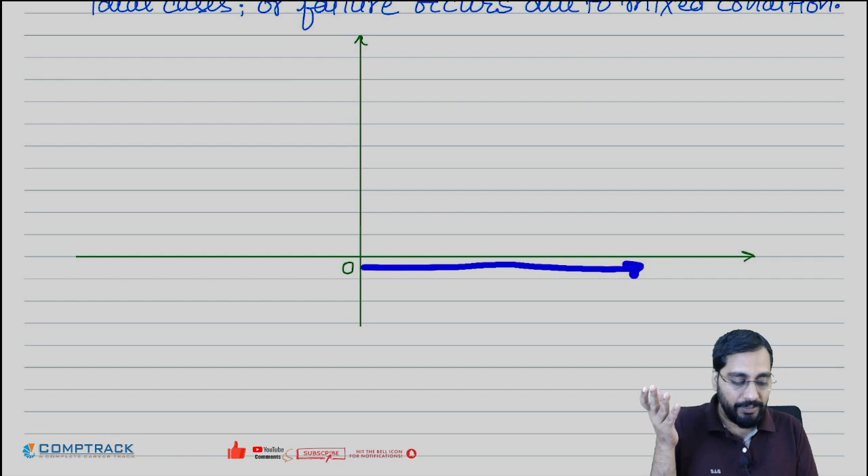Kaise banaya diagram? On X axis, he considered pure static loading. So in case of pure static loading, when stress value will reach sigma ut, then failure will come in picture.

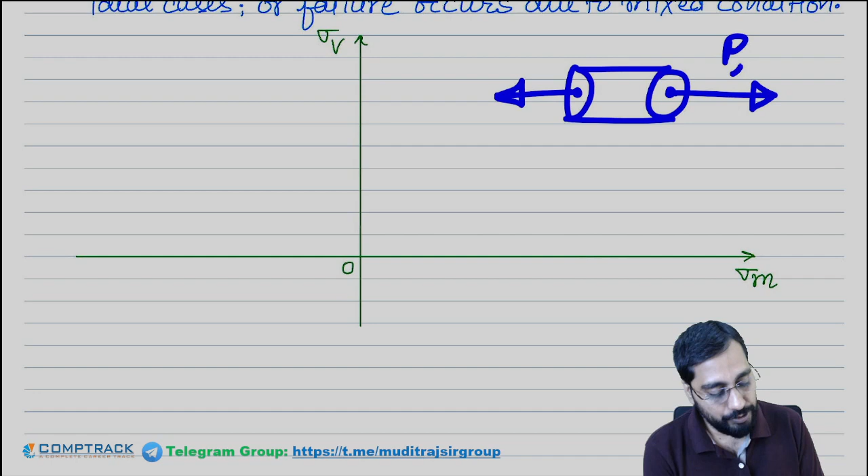So here he considered sigma m and here he considered sigma v. So for static loading, let's say this is the member and you are applying the stress like this. So load will increase 0 to, let's say, maximum value. So stress will increase minimum to maximum.

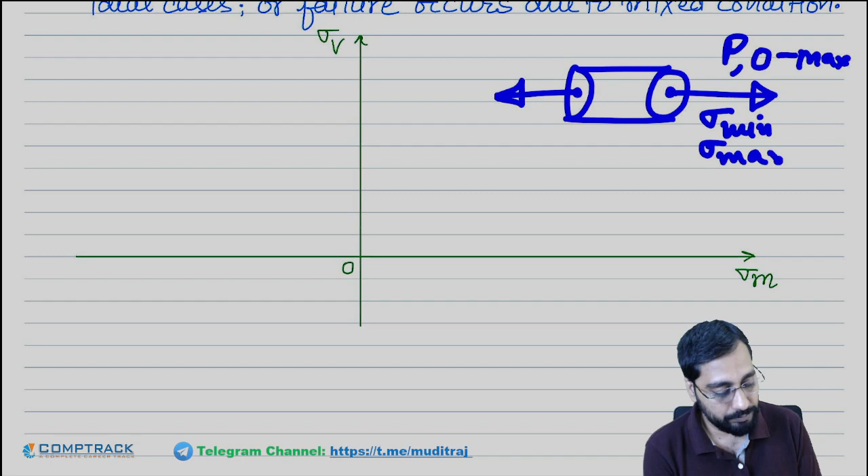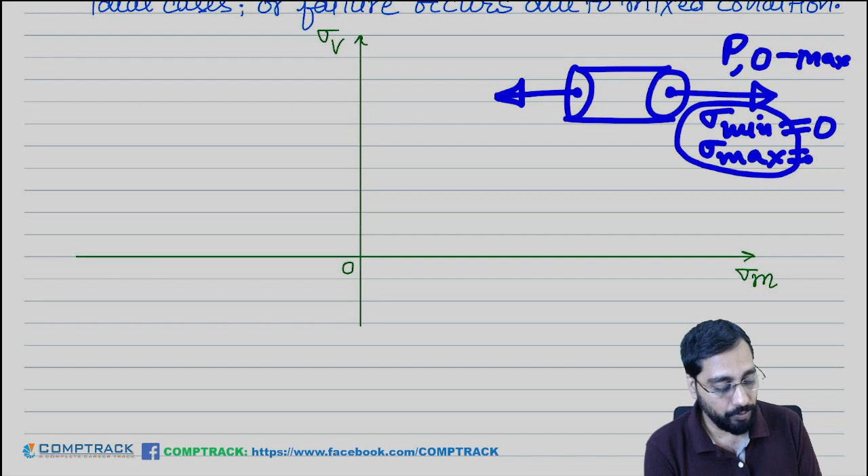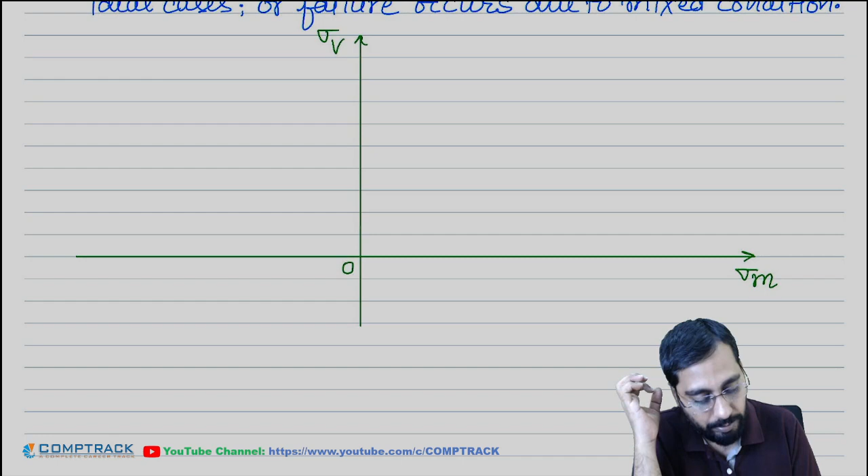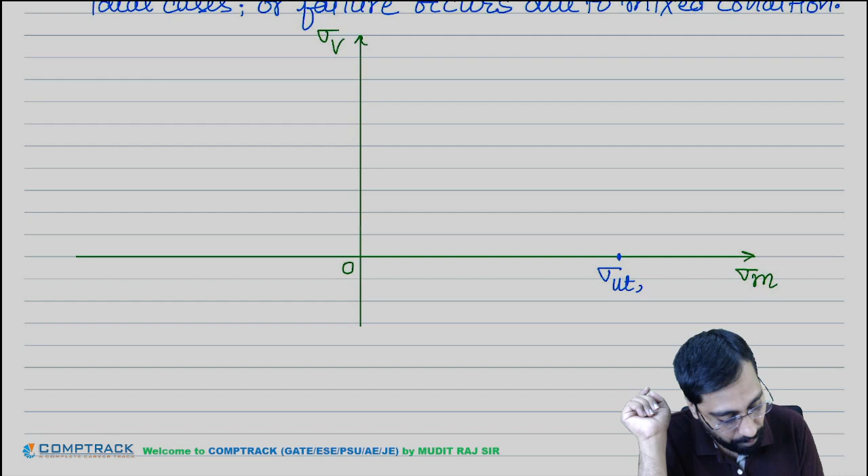So in this case, minimum will be equal to 0 and maximum will be equal to sigma ut. So when sigma ut value will reach, material will fail. So on the sigma m axis, you will get a point of failure due to static loading, that will be sigma ut comma 0.

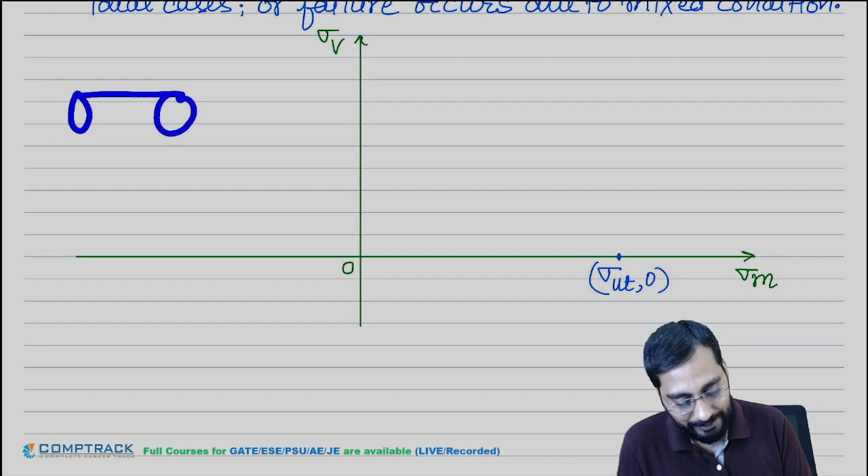Now when you consider second case, load is completely reverse, plus and minus, plus and minus. Let's say plus 100 and minus 100. In that case, the mean stress will be 0. So sigma mean will be 0. This case will lie on y-axis.

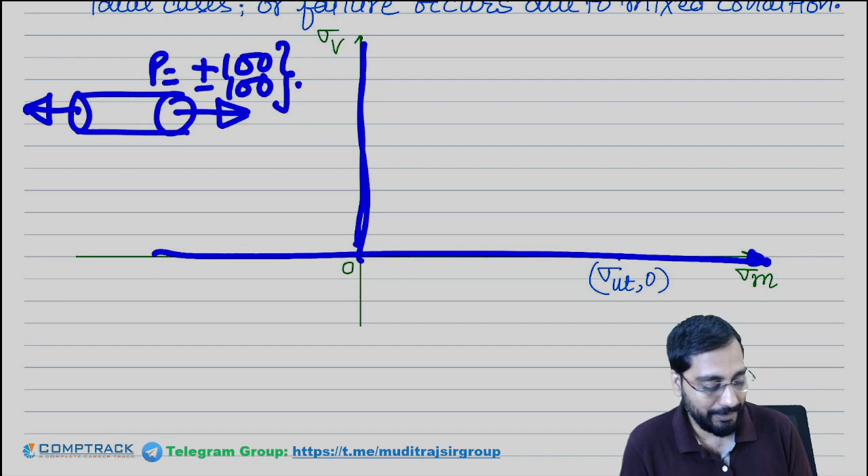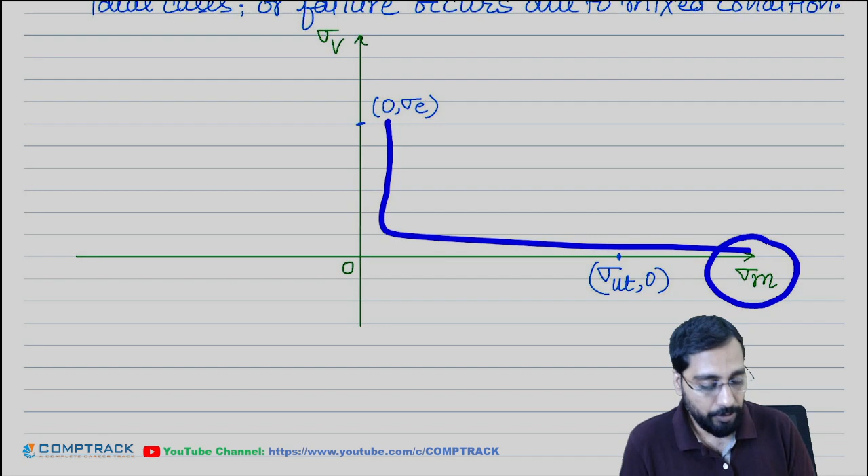Static wala lying on x-axis. So point will be here. And failure will happen at the sigma E. So this point will be actually your sigma E. So 0 comma sigma E will be the point, because 0 will be for sigma m. So for completely reverse loading we know sigma m is 0. For completely reverse sigma m will be 0.

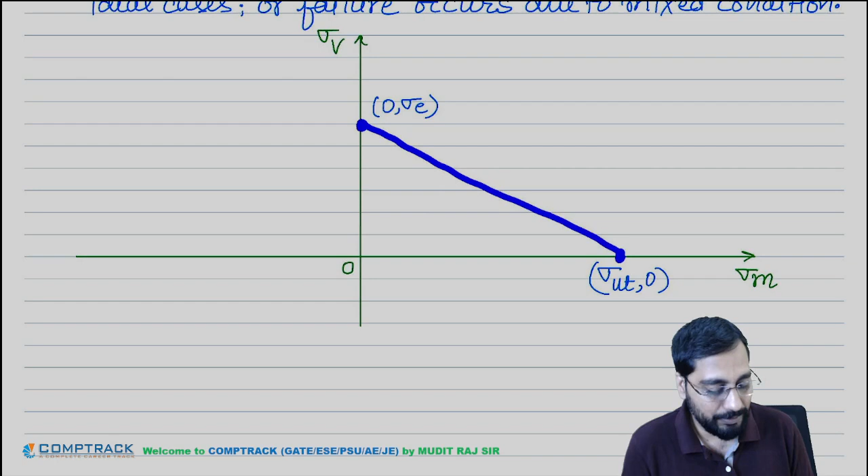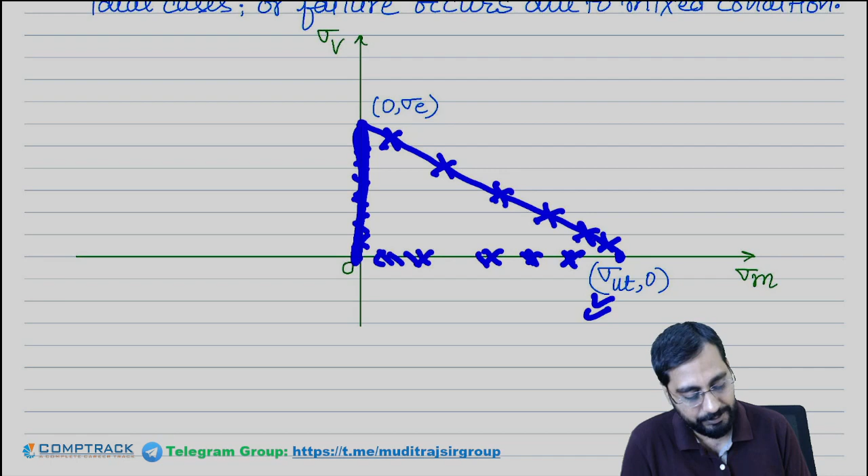Yes or no? So these are the two ideal points, but real situation lie between them. So you will connect with the line. Failure can occur here, here, here, here, here. Or if you talk about this point, then stress is less than sigma ut, failure will not happen. So at this point failure will not happen. These all are safe points. So here also failure will not happen. These are the safe points. So when you will go inside this area, for all these points, these will be your safe points.

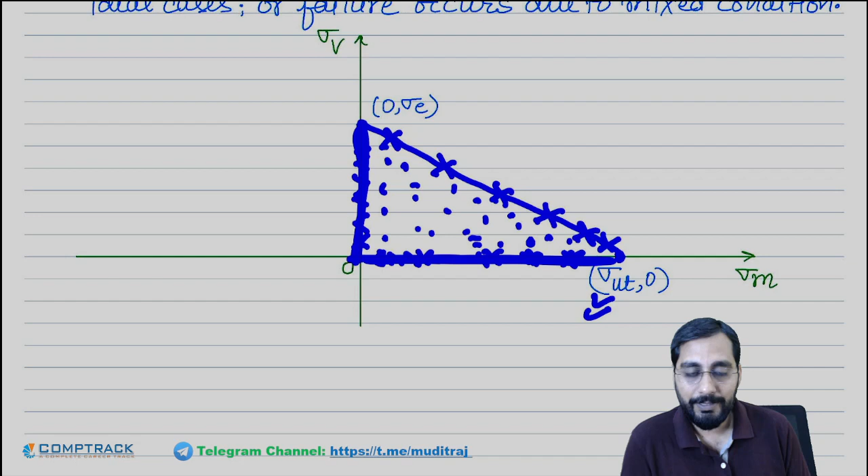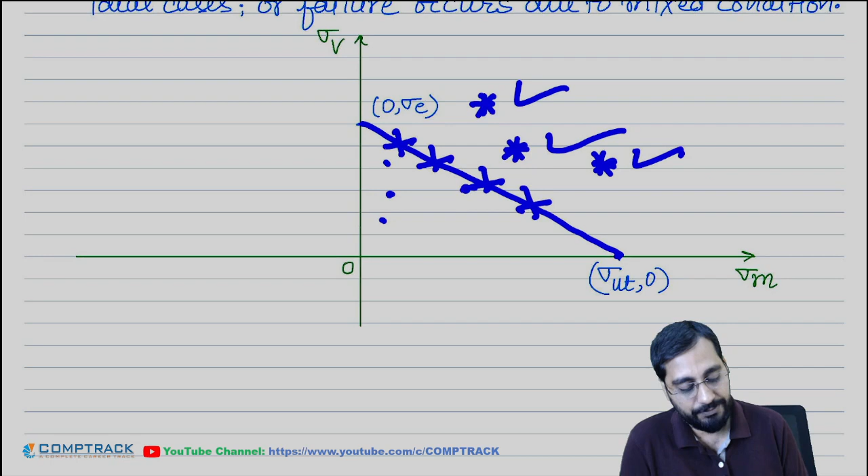This line is your boundary line. Here failure will just about to start. When you will go at any point outside this area, failure will occur. Failure, failure, failure. Safe, safe, safe. Clear hui baat? So he will connect the line like this.

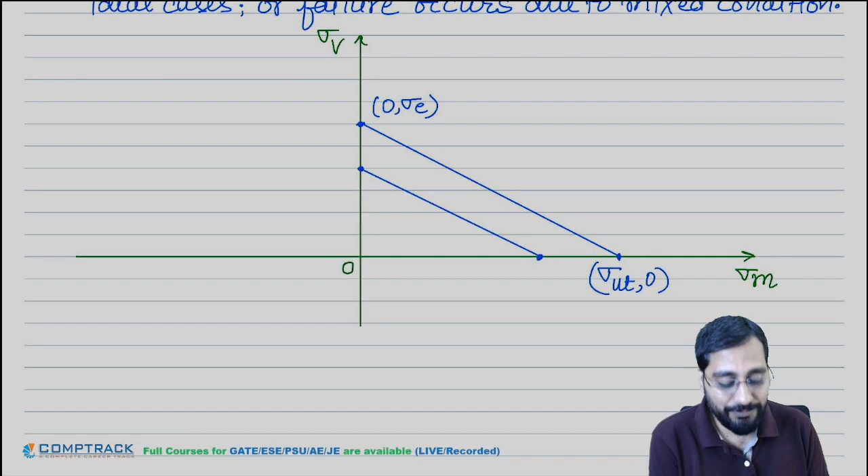But there are always uncertainties regarding load, material and the dimension. So there is factor of safety. So we will not consider the sigma E maximum limit. We will consider maximum limit sigma E divided by Fs. Let's say Fs is 2, sigma E is 100. So only at 50.

Completely reverse loading failure will start. Here also you will consider sigma ut by Fs comma 0. This will be the point.

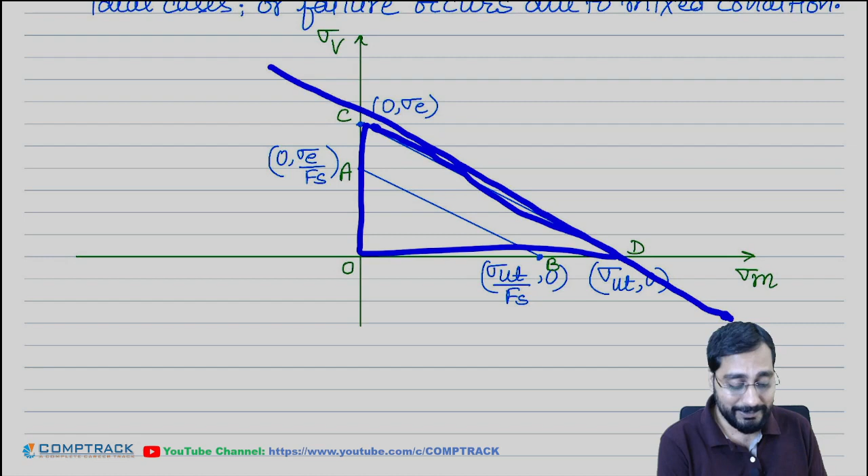So now let us assume this is AB and these are CD. So initially we were thinking we should live in this area, then we will be safe, because this is the boundary. After factor of safety, they are saying this is the boundary, but remain only in this area. So if you are living only in this room, then you will be more safe.

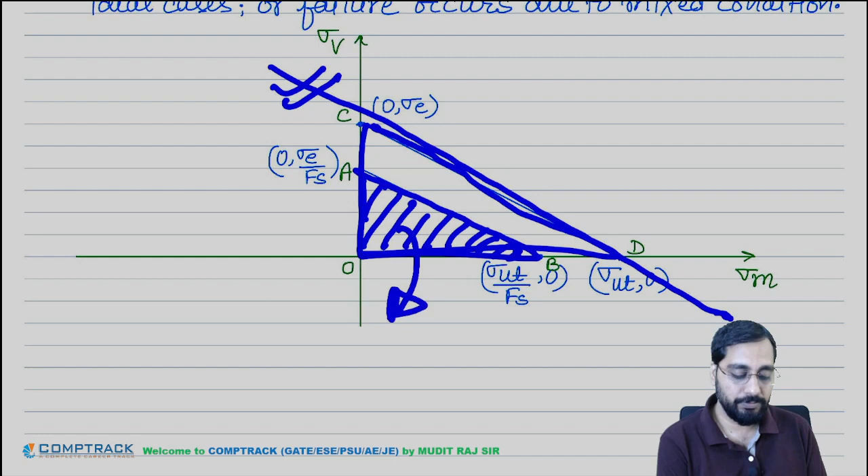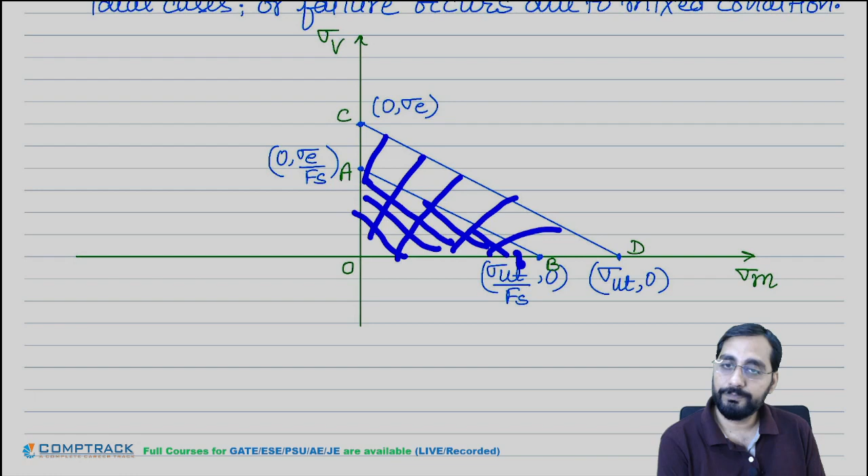So this will be the more safe zone. This is the safe zone and this is the more safe zone. Clear or not? Okay, so this will be the diagram or graph when you are applying the tensile loading.

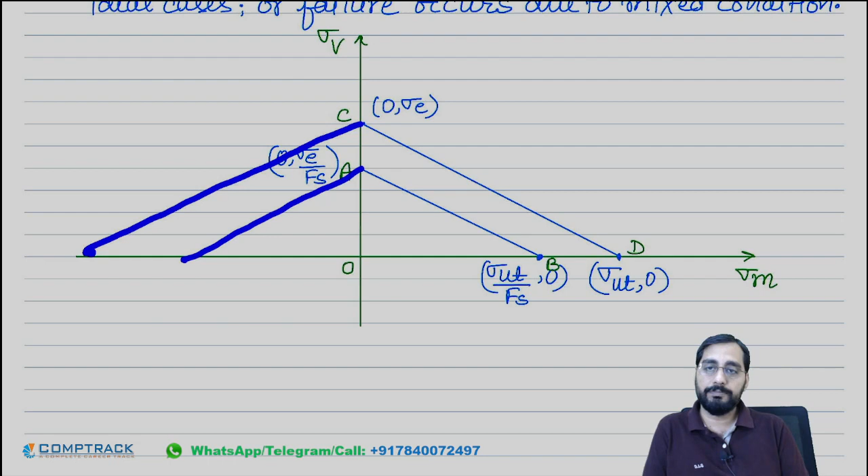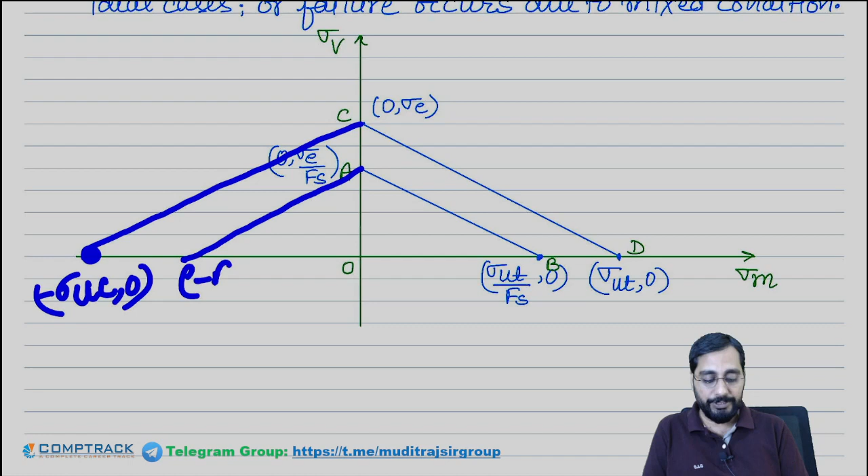If you are applying the compressive loading, same line will go on left side. Here it will be minus sigma UC comma 0, minus sigma UC divided by factor of safety comma 0. These will be the same point. Clear or not? Bolo, yeh diagram clear hua? Bana do isko.

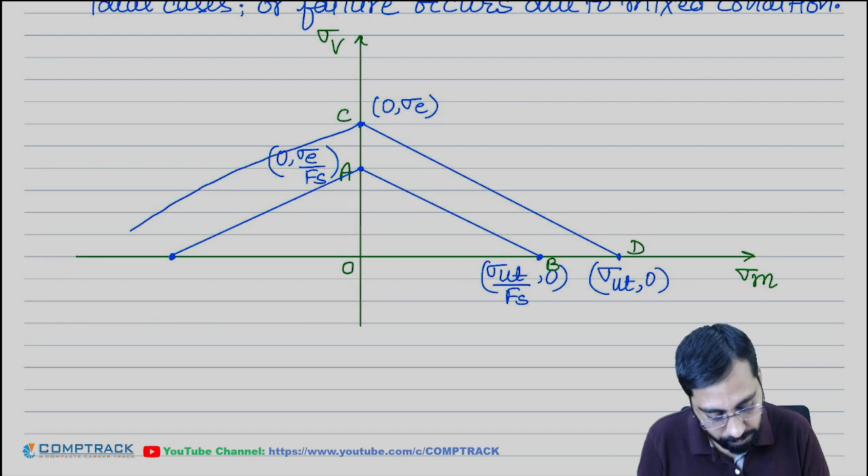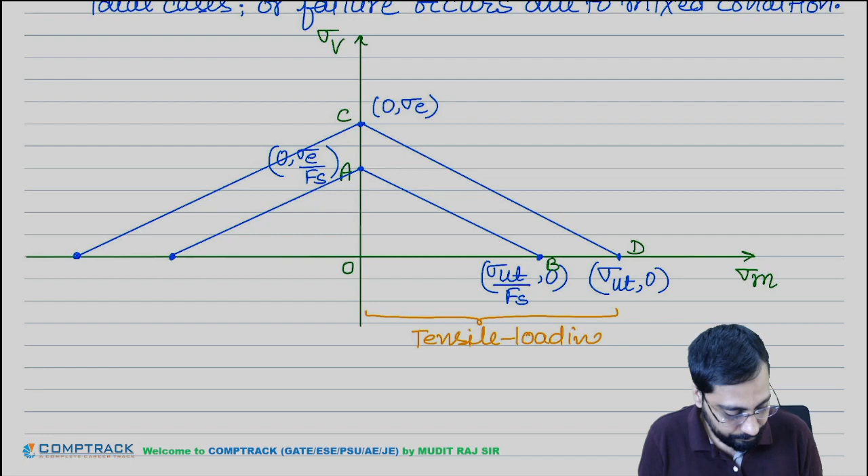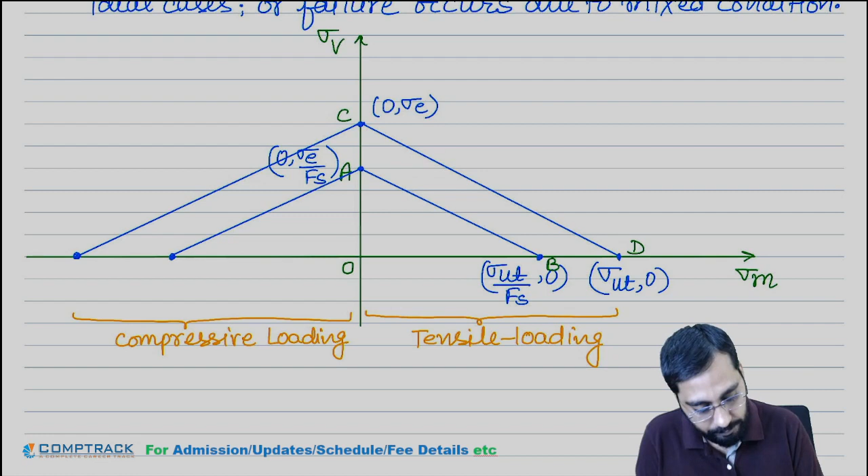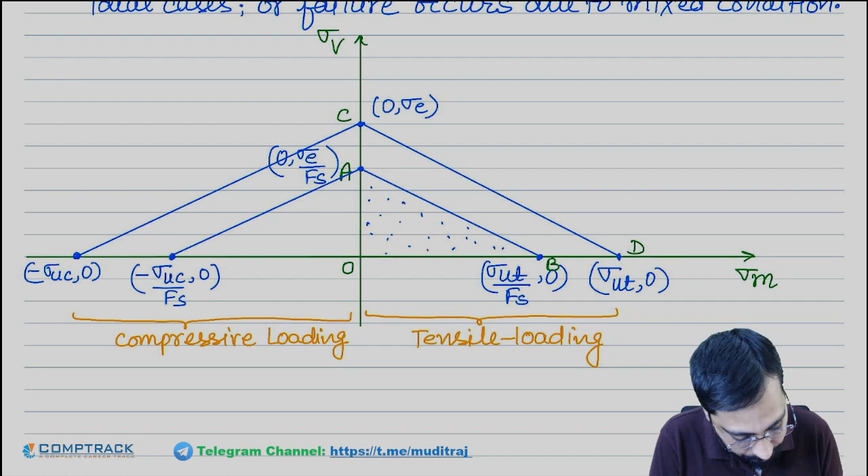So this is for tensile loading. This is for compressive loading. Here it will be minus sigma UC divided by factor of safety, like this. So this is the safe zone. Or you can say safest zone.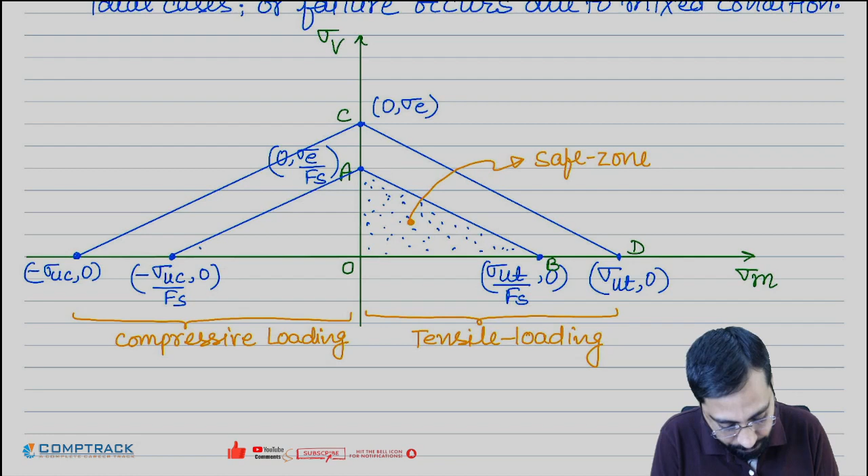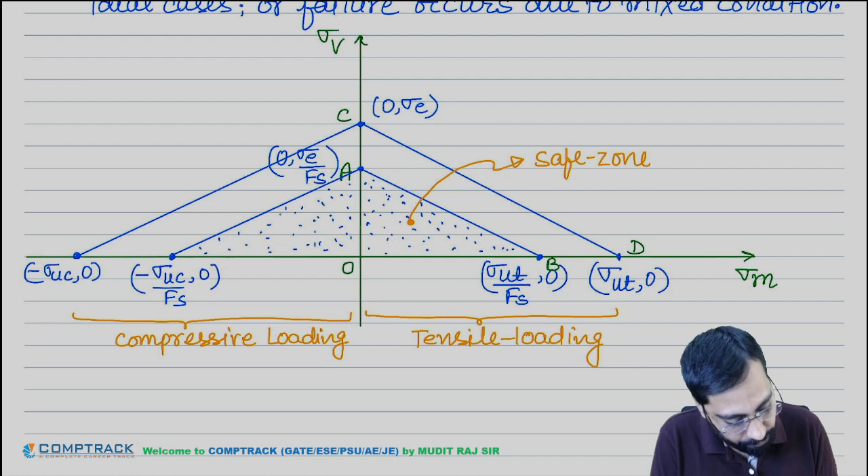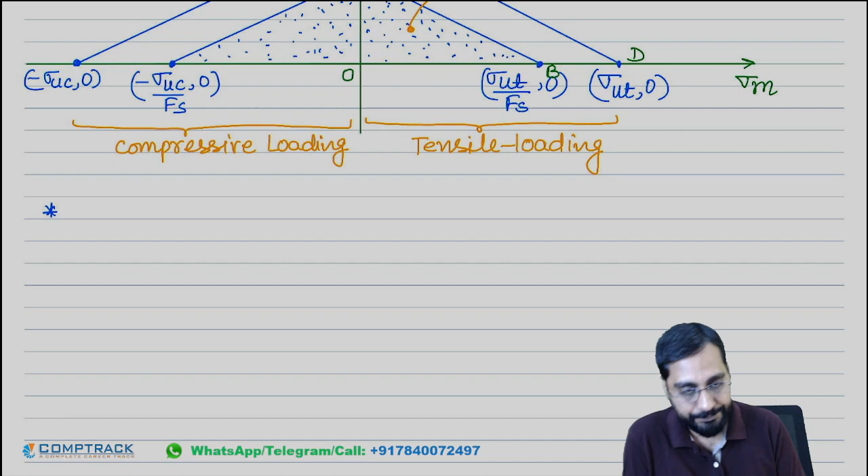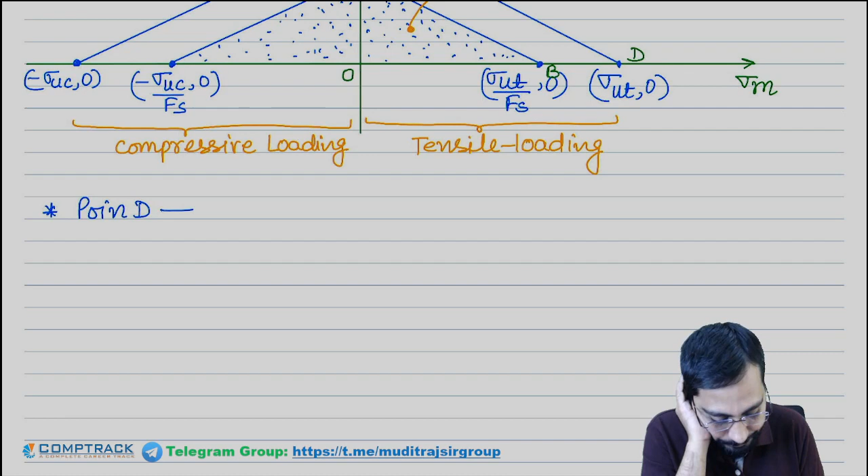Write down 'safe zone' here. Okay. Now write few points. First point: point C and D are obtained. Point C, point D - only perfect static tensile loading.

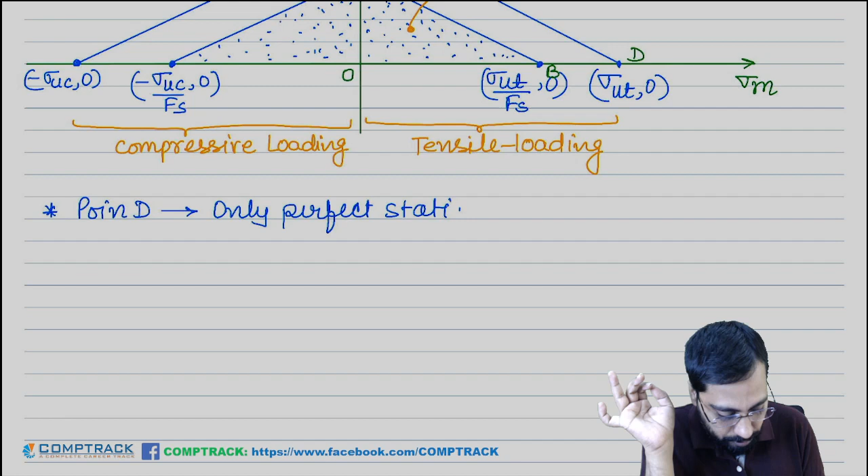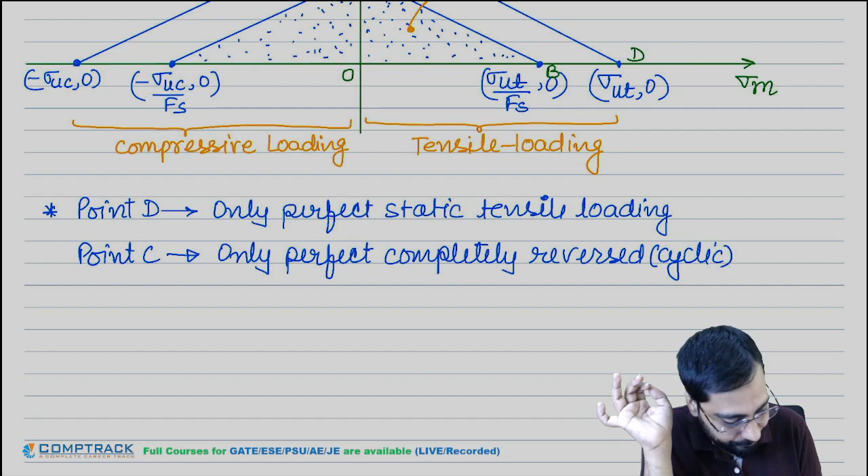Point C - only perfect, completely reverse or cyclic loading. But these are ideal cases.

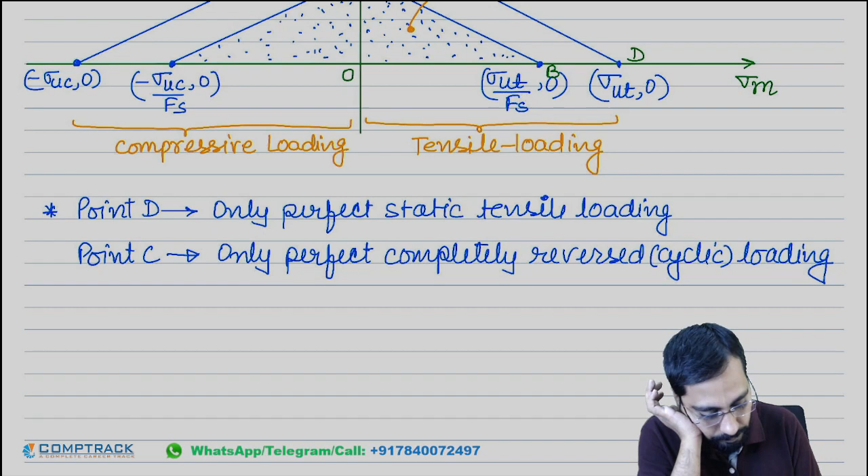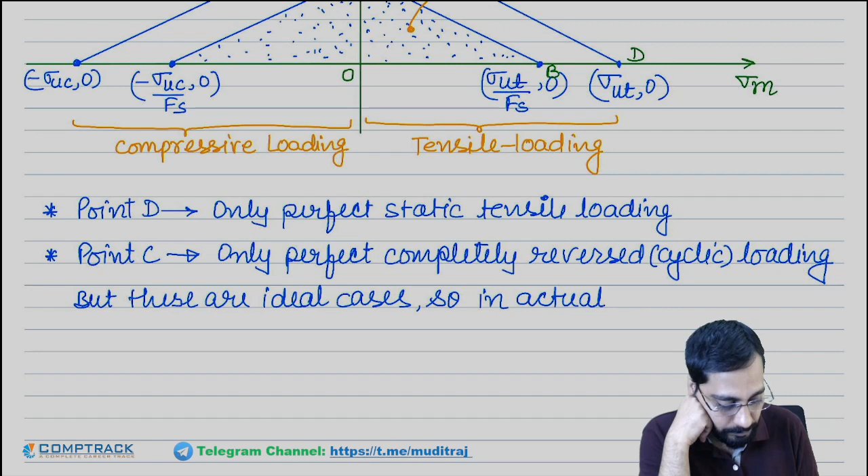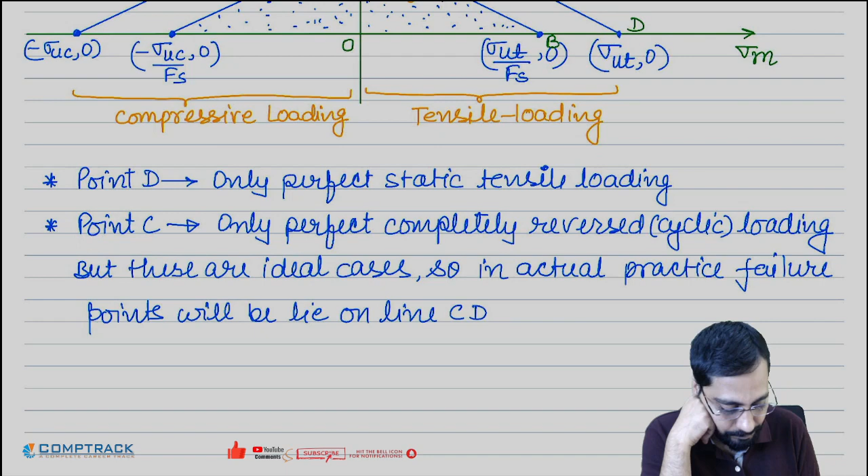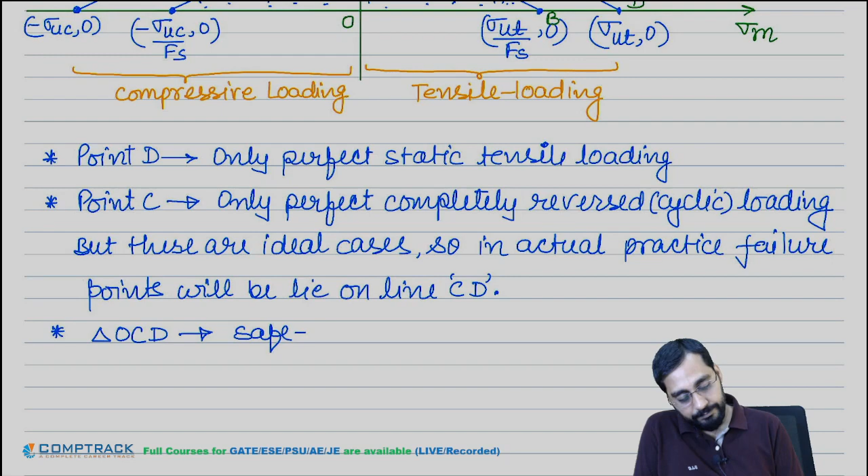So in actual practice, failure points will lie on line CD, on line CD, that's it. Next, triangle OCD is the safe zone without factor of safety.

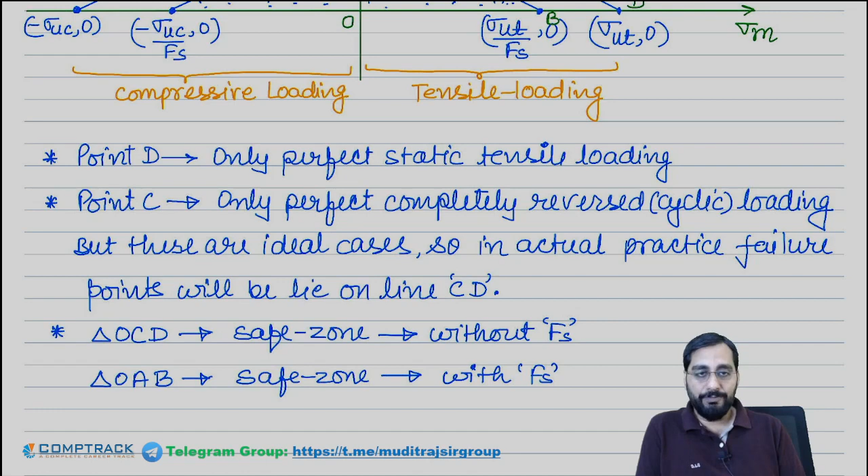Triangle OAB is the safe zone with factor of safety, okay. Now let us draw the derivation for it.

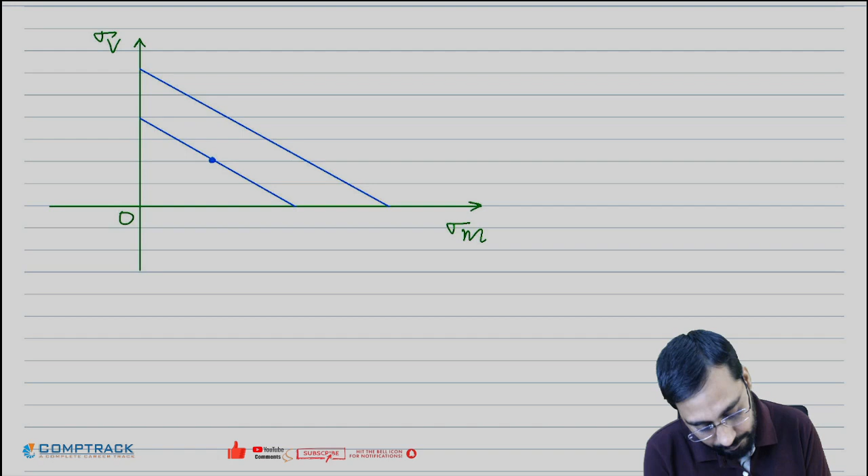Let's say this is the sigma V and sigma M line, and here this is the Goodman line. So when I am considering the factor of safety, AB line will be the failure line or the boundary line. Yes or no?

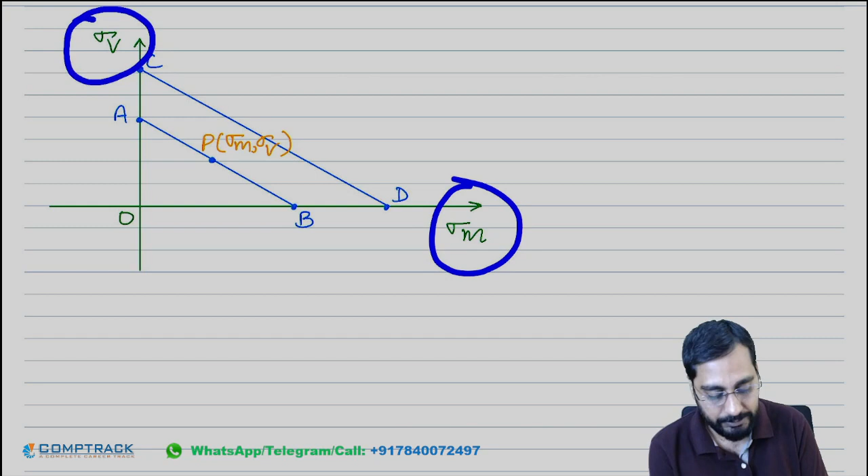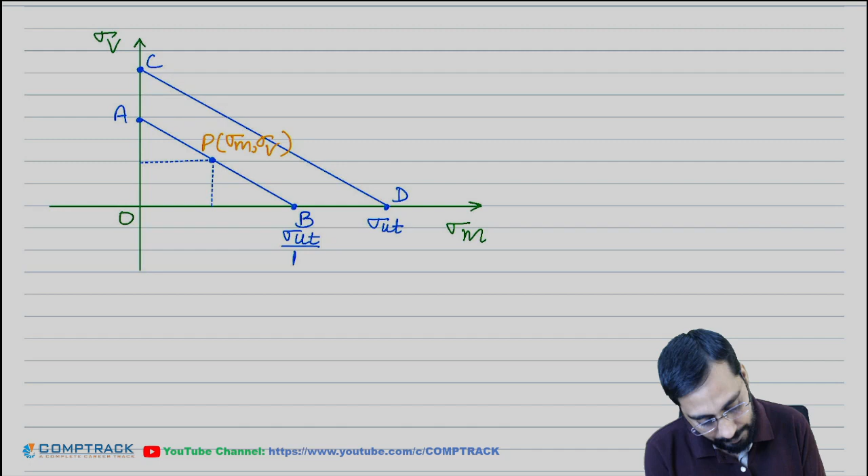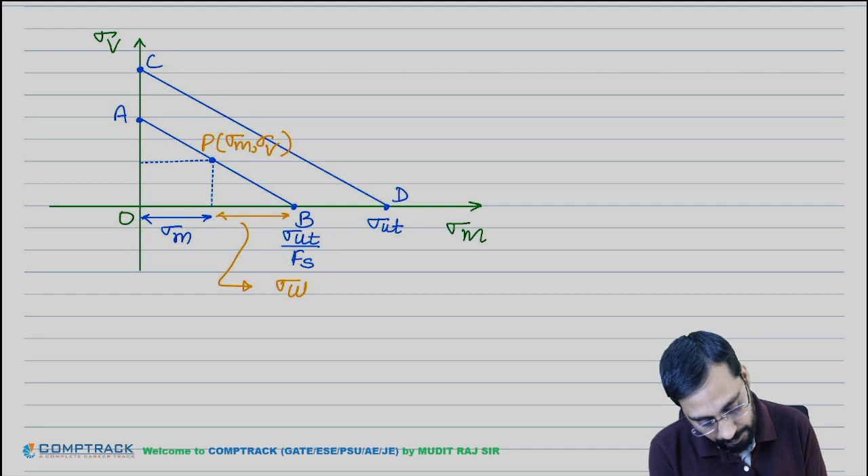So here, this will be the values. This was your sigma UT, and this was sigma UT divided by fs. This will be sigma M, because you are considering this point coordinate sigma M. So this value will be what? This value will become sigma UT by fs minus sigma M.

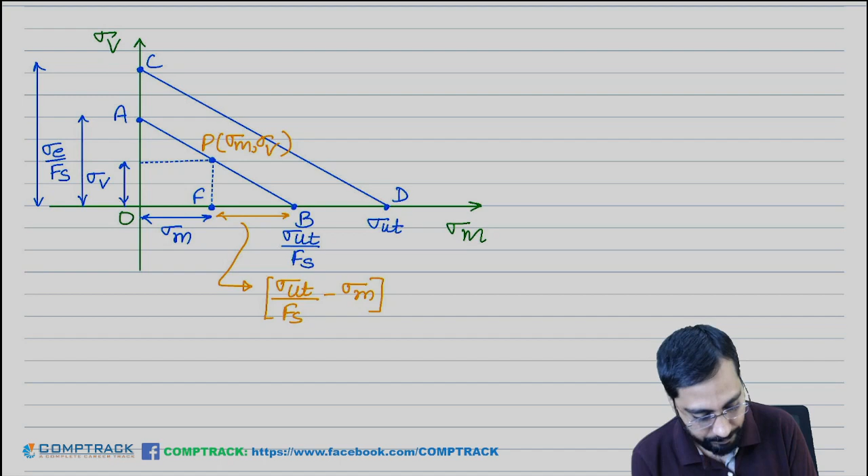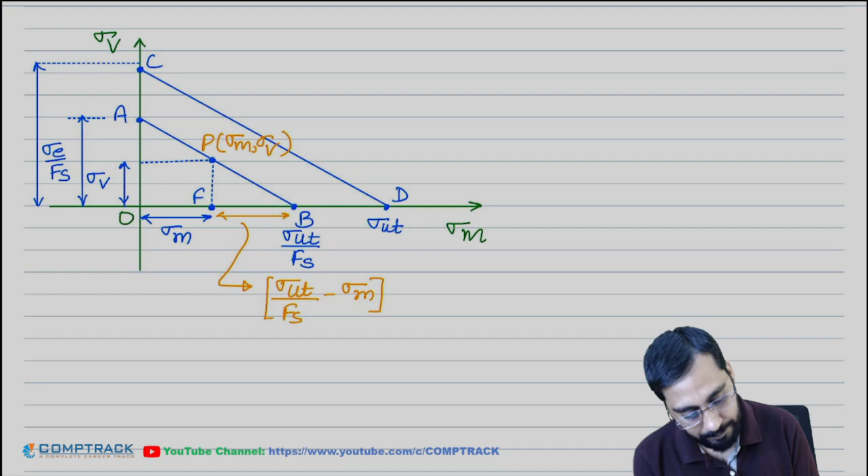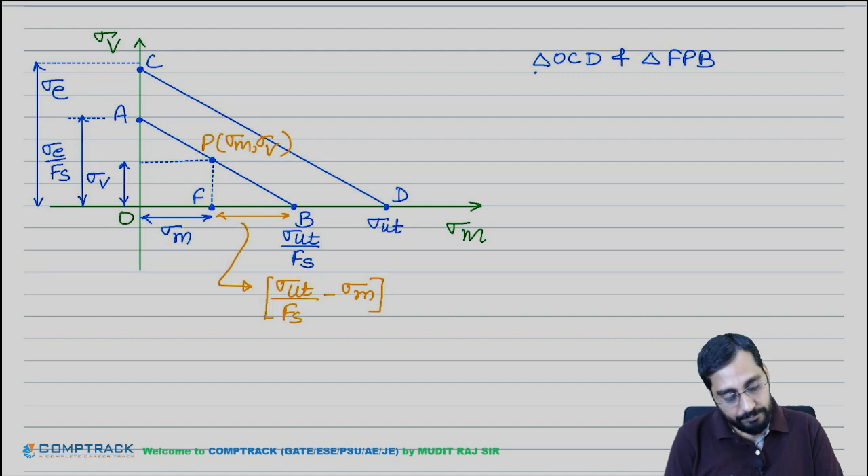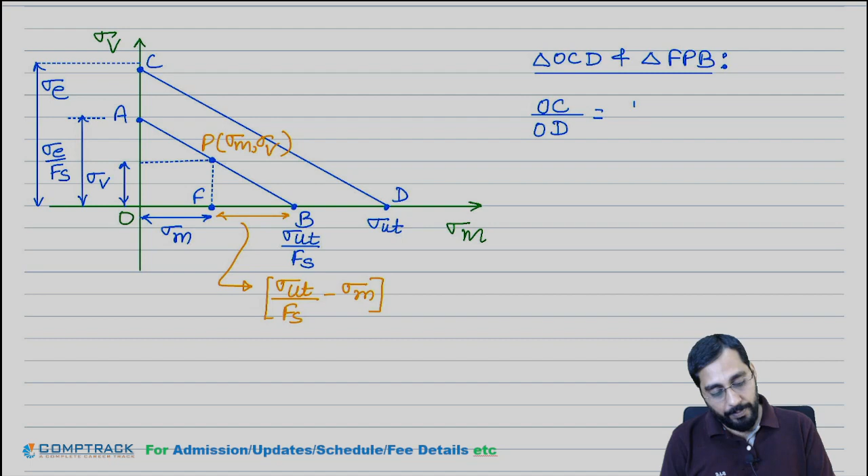Sigma E. Now compare the triangle OCD and FPB. Here you can write OC divided by OD will be equal to FP divided by FB. Yes or no? Bigger triangle, smaller triangle.

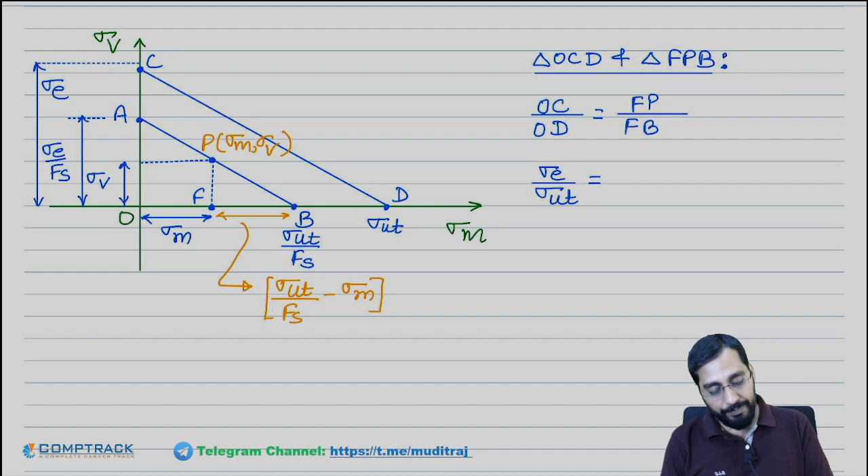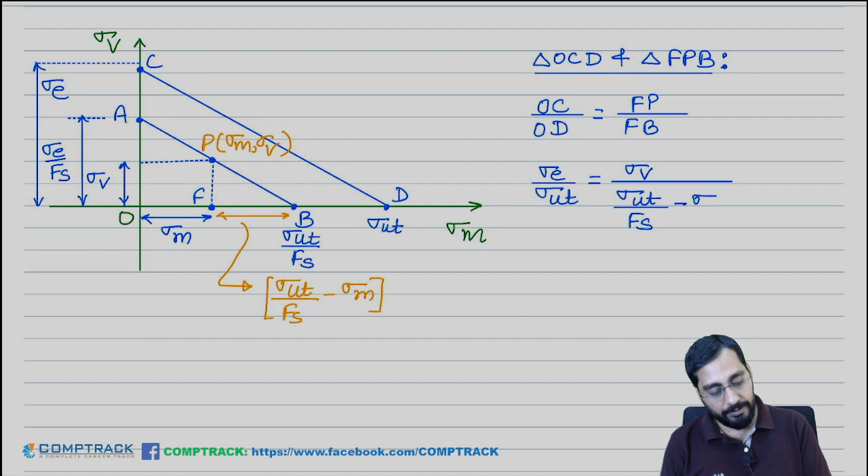Both are similar triangles. OC is sigma E, OD is sigma UT, FP is sigma V, and FB will become sigma UT divided by Fs minus sigma M. Minus sigma M - this value will become. Clear?

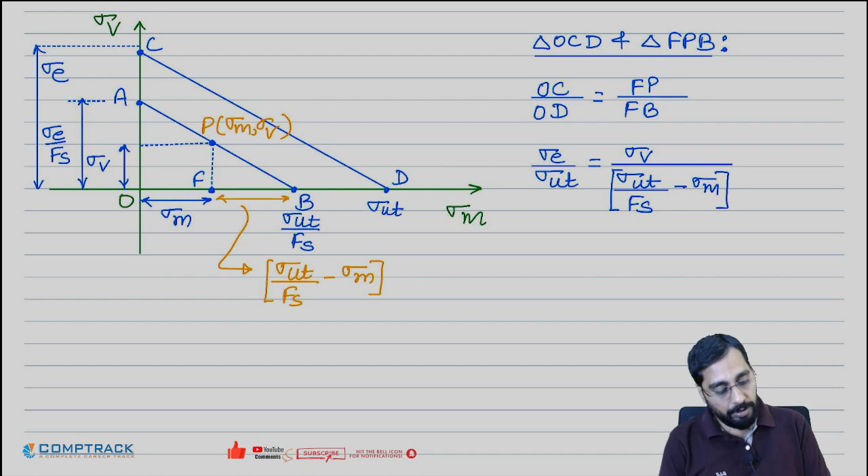So here you can solve it. Solve this. When you will solve, this much will become sigma E into sigma UT divided by Fs minus sigma M equals to sigma UT into sigma V.

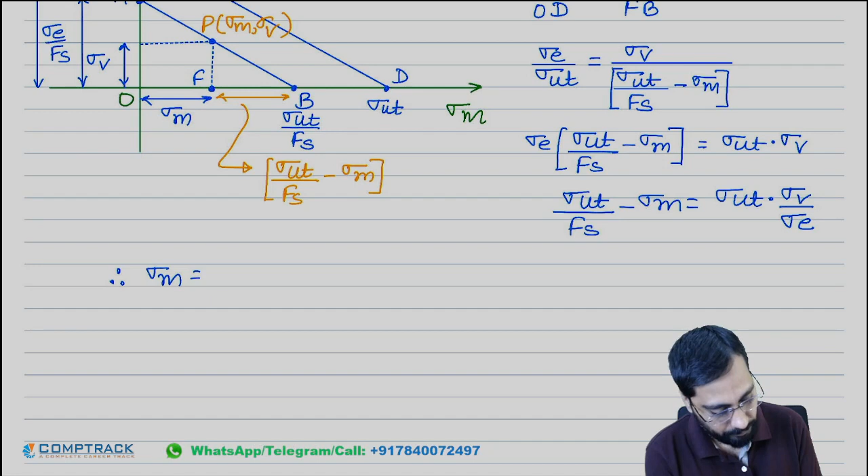This will form. Now take this on different side. So when you take it on this side, sigma M will be equal to sigma UT common, 1 by fs minus sigma V by sigma E - it will come like this. So from here, sigma M by sigma UT is equal to 1 by fs minus sigma V divided by sigma E. So 1 by fs will be equal to sigma M by sigma UT plus sigma V by sigma E. Yes, this is our equation or criteria.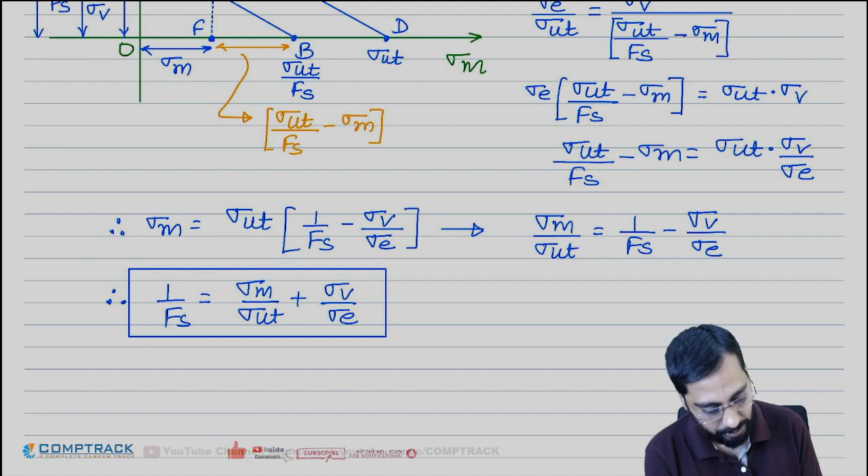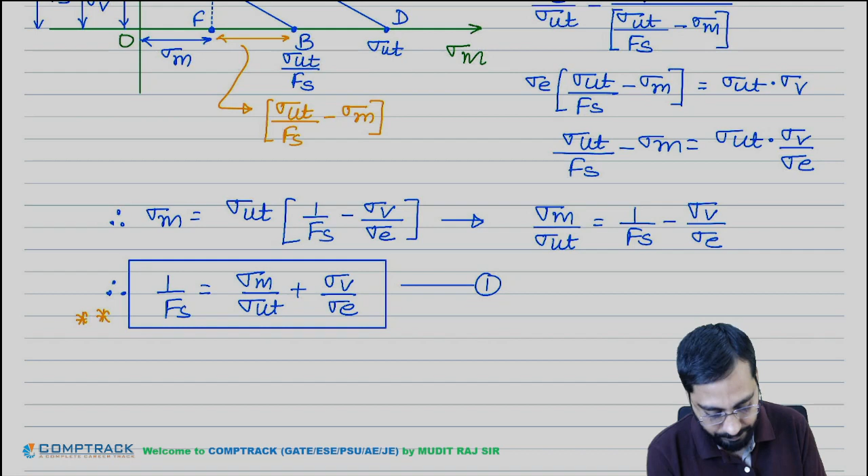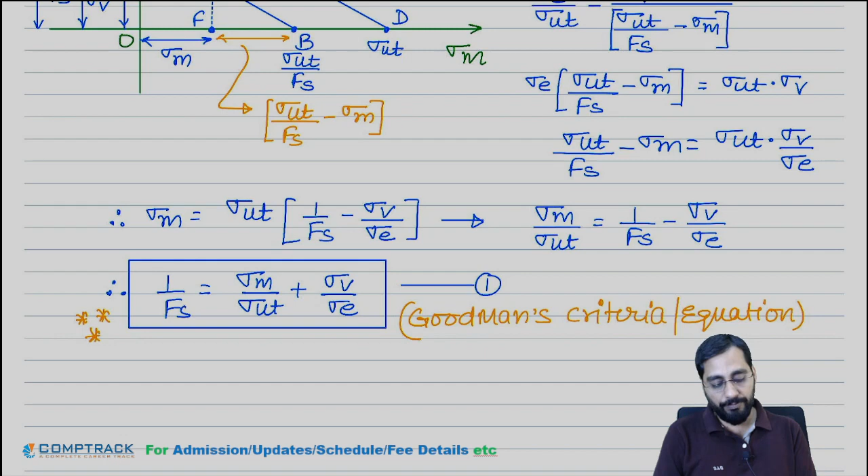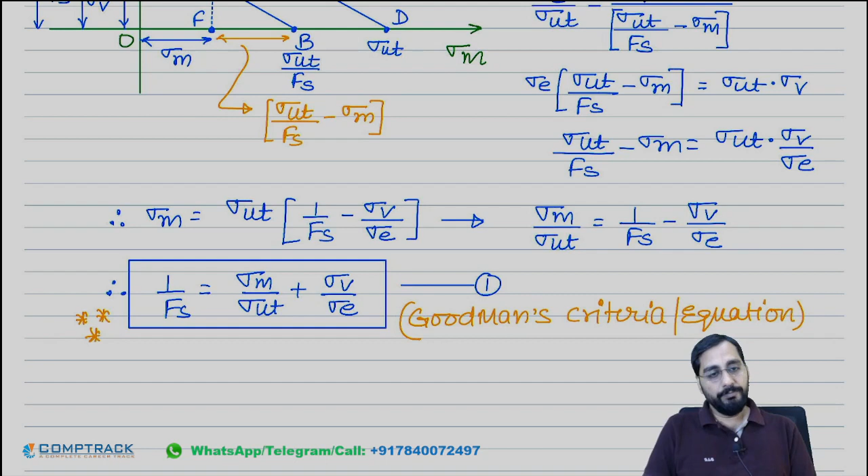Okay, so this will form. This is called your Goodman's criteria, or Goodman's equation. Here, sometimes they will give you the value of factor of safety, and you can find sigma E, and sometimes they give you the value of sigma E and you can find fs. So this is Goodman's criteria. Is everyone clear?